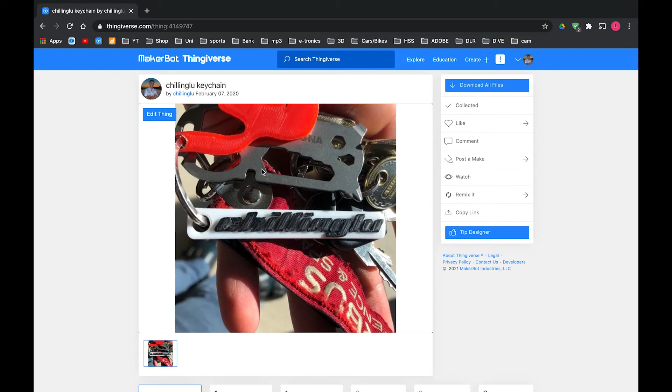So around 2 years ago, I designed a few keychains with Bro or Tesla written on it or even ChillingLu, and I even uploaded them on Thingiverse, as you can see right here. But somehow I didn't manage to produce a YouTube video for that, but I got a tiny bit of spare time, so now I'm shooting this video.

So what you need to create your own keychain is some sort of name or what you want to print on your keychain. And I reckon my ChillingLu on my YouTube background banner is quite nice. So I take a screenshot, crop it to the right size, and I save it. That's our picture, that's the draft we're gonna use. And then you just open up any kind of AutoCAD program. I like to use Autodesk Fusion 360 because it's freeware for students.

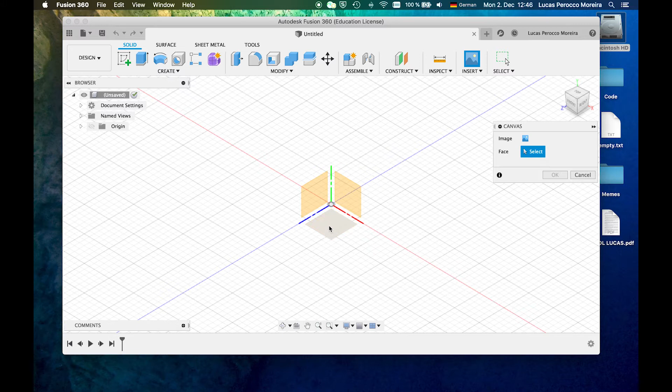And so what you do is just press on this image, insert canvas, select a plane, and I like to choose the XZ plane. And after choosing this plane, you can choose your image. And what I like to do here is align the picture in such a way that the origin is on its bottom left corner. Okay, the spacing also looks alright.

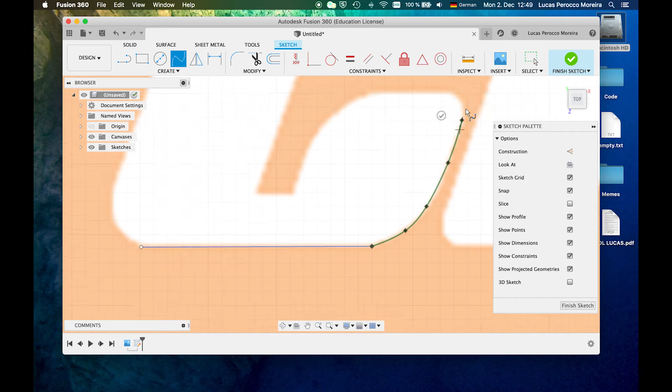So next we gotta create a sketch and click on spline and then fit point spline. And what this does is it allows us to go all the way around a letter around its perimeter and create a closed shape around a letter that we can later extrude. And we need this extrusion to 3D print a single letter. This process is quite simple, but it takes some time since you gotta do this for each and every single letter.

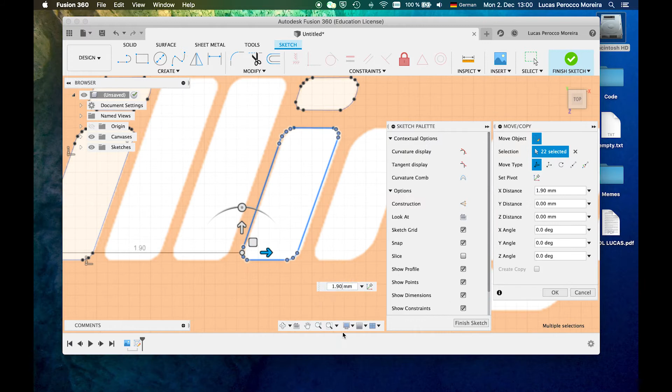So in the following, I'm just gonna show you my time lapse of how I did these fit point spline curves on my ChillingLu, because it's pretty straightforward. You just gotta place your splines and at the end you get a closed shape. But there's one little hint, and that's if you have two identical letters or even more, you just need to create one closed shape for that letter, and then you can copy paste the closed shape again, and you don't need to recreate all the splines for basically the same letter again.

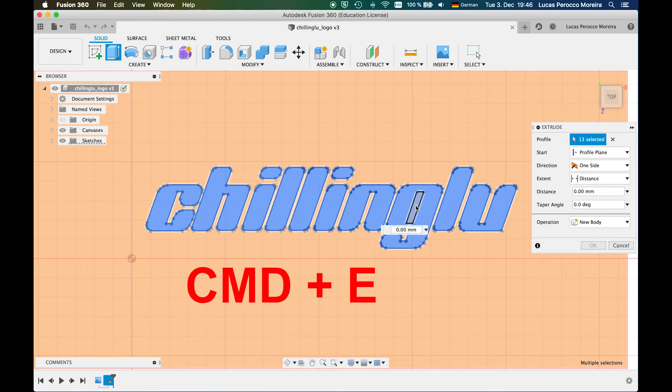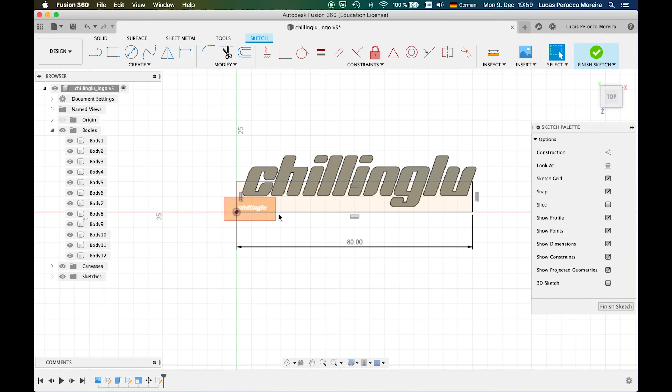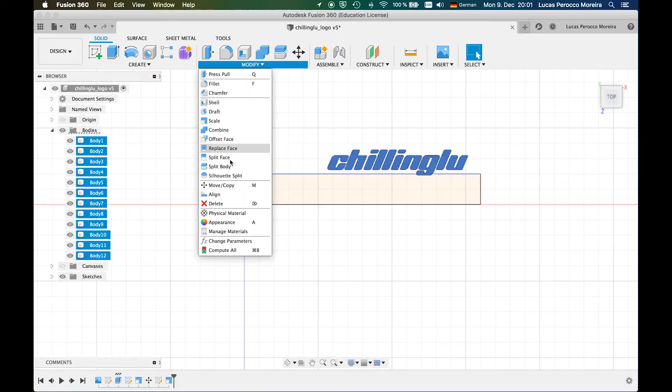Okay, after this process, we select all the letters and press Command or Control E for extrude. And select any height because we can adjust it later anyways. I chose 0.3 millimeters. And this is another keychain I designed a long time ago. I'm just gonna check the dimensions since it turned out to be quite good. Now I'm just gonna create the base for the keychain with the dimensions from my Tesla keychain. This is the hole that's gonna be attached to the chain. And I'm just gonna scale the name to fit on my base. And there you just gotta play with your own name and see how it fits, how you gotta scale it.

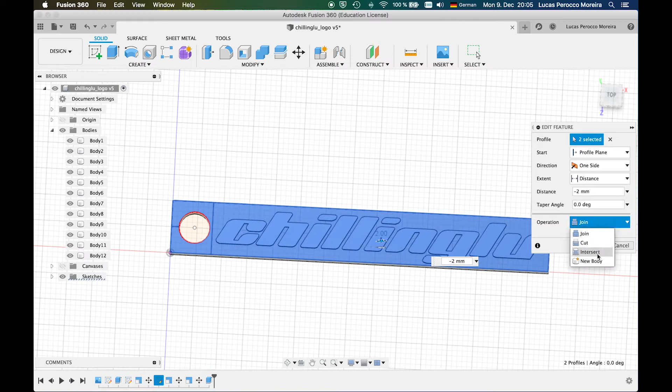Then you extrude the base to 2 millimeters, and afterwards you extrude the letters to also 2 millimeters. Now you just gotta click on this button and reverse the joining of those bodies and select new body, so every single letter is a new individual body. And now you can actually scale those letters without scaling the base as well. I chose 1.5 millimeters height, as you can see here.

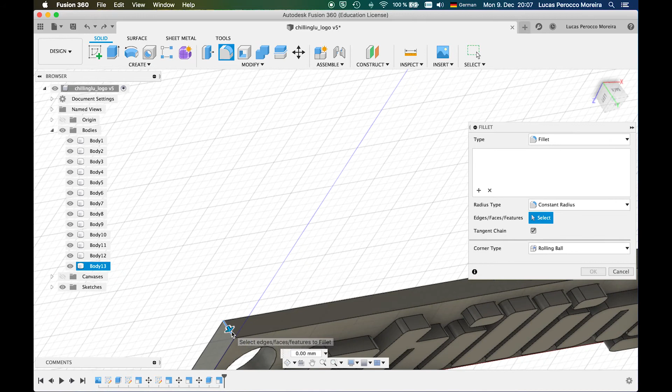So now we're just gonna fillet all the 4 corners of our base so it looks kind of nice and smooth. And I'm just playing around with the radius, and in the end I choose 2.5 millimeters. Okay, now we're almost finished. You can now just play with the colors so you actually see how it's gonna look later after printing, and bam, that's our keychain.

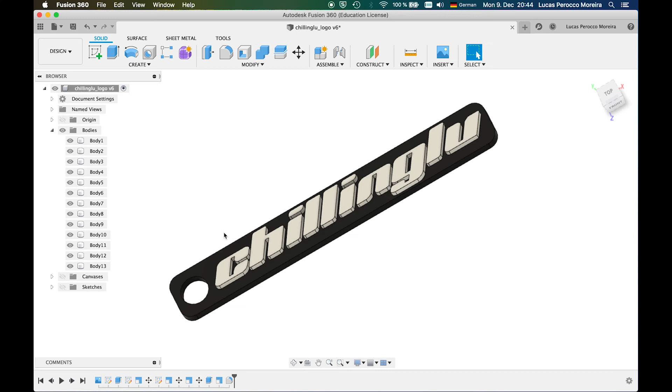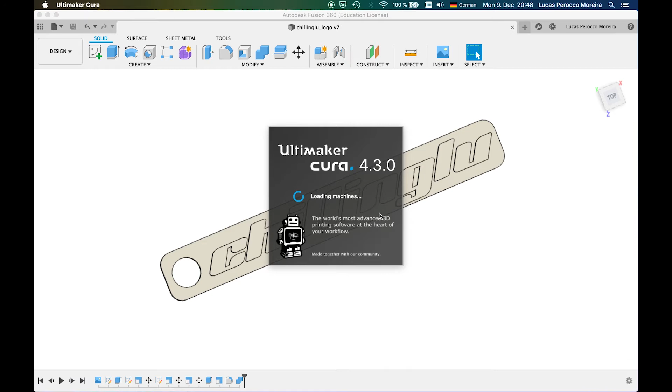And now you just gotta join all the bodies to one body so you can later export this single body as an STL file. And these settings you can usually accept since they're good enough for our purpose. You choose your saving location, save the file, and that's how it looks. Now you open your slicer. I use Cura, but you can use any other software. Cura is freeware, so that's why I use it.

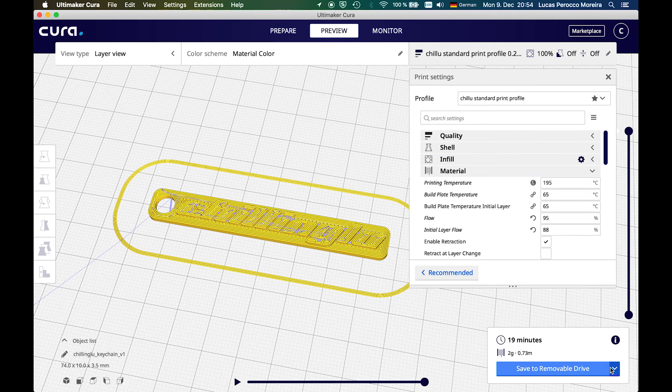And now you gotta choose your orientation. I used to print it that way, so you turn it by 90 degrees. A few settings: set the infill to 100%, choose your plastic temperature for PLA or ABS, whatever you're using, and save the file to your SD card.